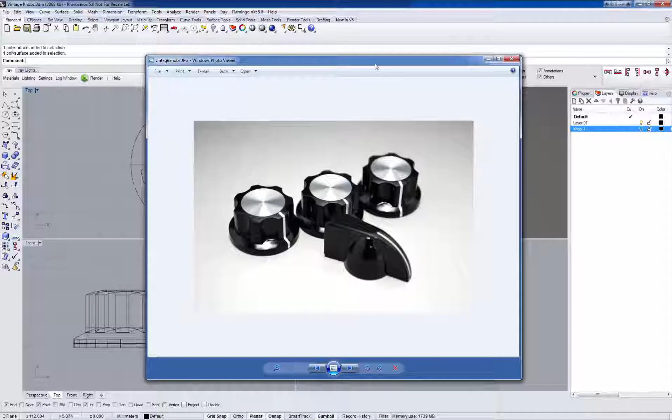Hi, in this video I would like to show you some modeling and rendering tips to render out a vintage knob like you see here on this image. This is the reference image where I created the model from, which you can see here in the Iray preview. So this is the plain model, and now let's start applying some materials to it.

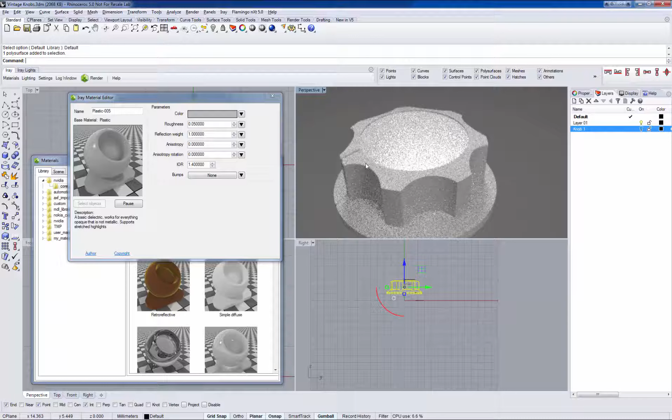So this is black plastic. Let's add and edit this material to the scene. We can assign the material by dragging and dropping the preview icon to the object, and we set the material color to something very dark. Never set it to pure black because that will look unreal, but something like that.

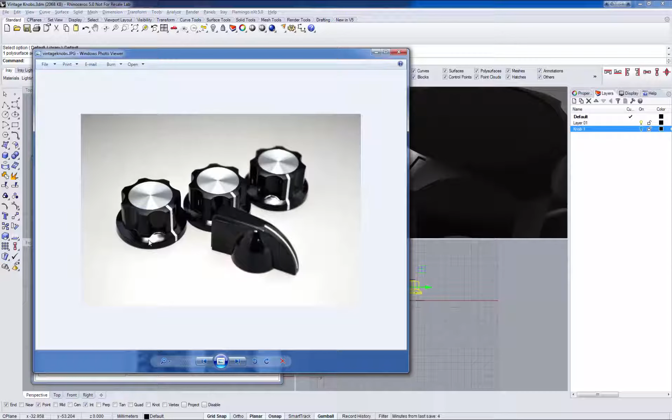If you take a close look, you see that the surface appears very smooth, so there's no structure there. But if we compare with the image, you see there's some slight bumps going on. So let's create these bumps first.

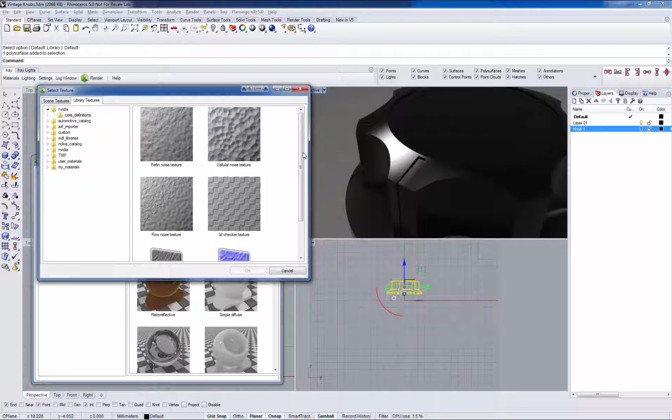We have a slot here that allows me to connect bumps, and I'm going to select a texture. If we switch to library textures, we see all the procedural textures that come with Iray for Rhino, and we're using a Perlin noise for our purpose. We apply it, but we don't see much of a change yet.

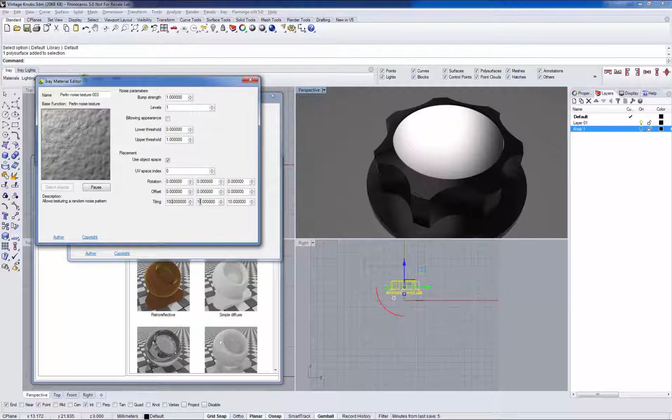The reason for that is that our model is in millimeters, and we need to increase the tiling by an order of magnitude to actually see this pattern. So if we take this for 100, I guess we need something like 1000, or probably even more, to get the structure, and we start seeing now the pattern.

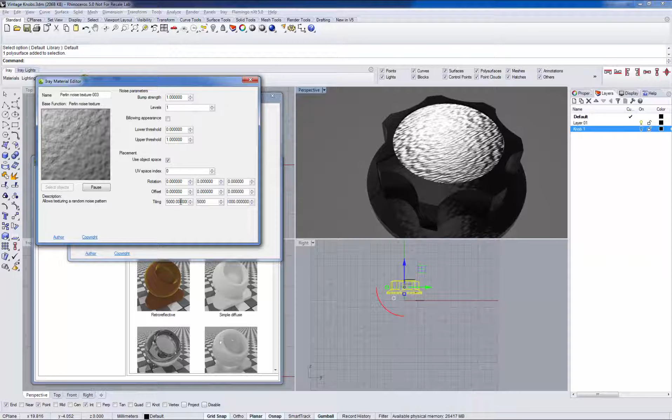This needs to be much finer, so we can go for 5000, and now we start seeing some nicer structure here in the reflections, but it's even finer.

So maybe we increase the intensity, set the bump strength to 0.5, and we add another octave so we get some finer final look. As you can see, maybe we can even use 3.

Yeah, let's increase the tiling, so we use 10,000. This is a really large number, but of course we are talking about seeing really very fine structures in our material here. Actually this looks good.

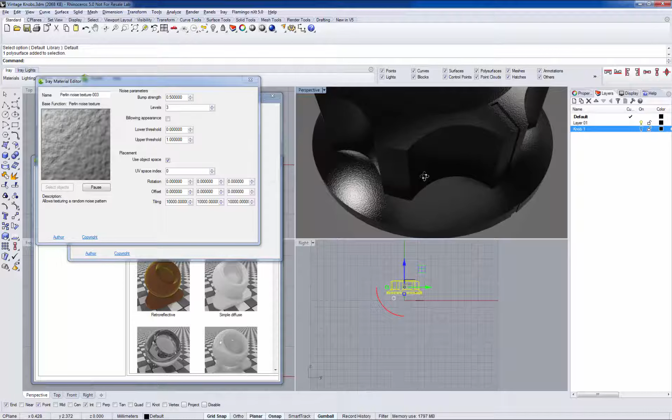I really like the look that we have here. It even allows me to set the roughness of my material to 0, so we get really more like this shiny, bumpy surface that I would like to have.

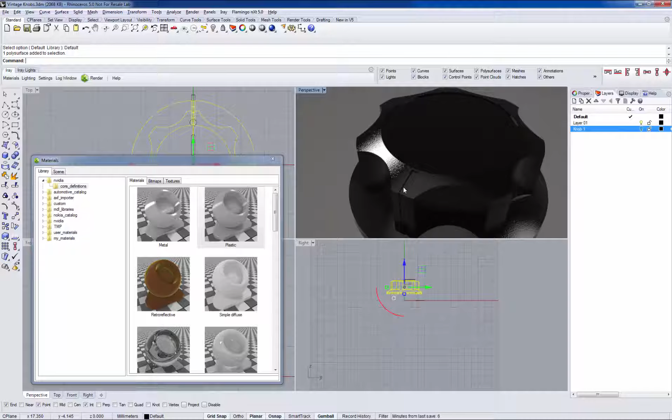The next step is that, you know, these edges are really sharp, so there's no rounding on these edges, and one way to do that would be to go in and place some fillets manually. This gives you greater control. However, this is a lot of work, and also this changes your model.

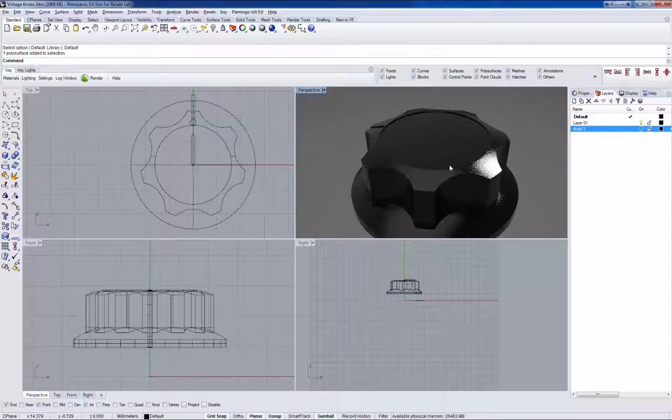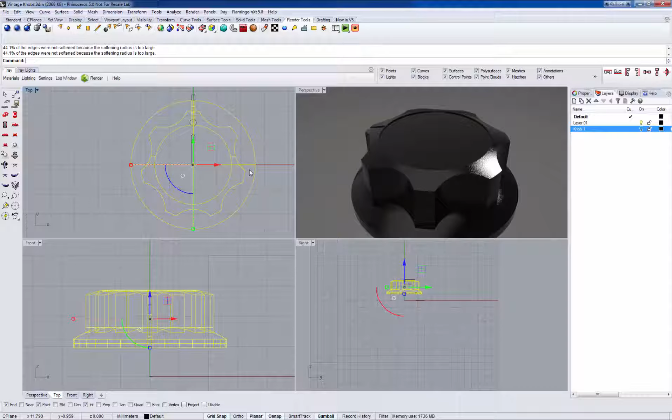There's a very nice trick that you can apply to get this without needing to touch your model. You select your geometry, and if you go to the render tools tab in Rhino, you see there's an apply edge softening operator. You can set the edge softening to a certain value, so 0.5 - if we're in millimeters, half a millimeter would be fine - and apply that, and you see that changes the mesh, and we get automatically now all these fine bevels, without having to manually model them.

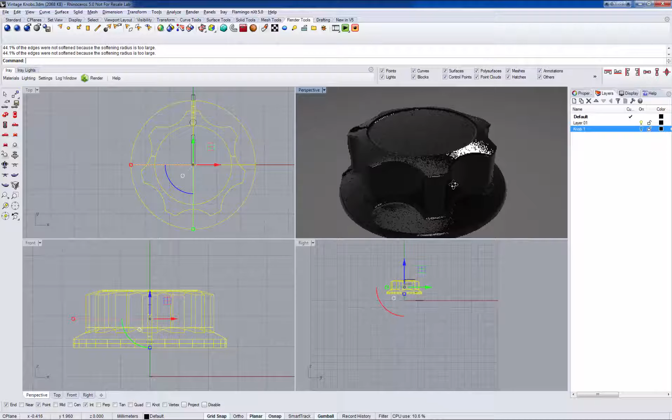So the model is still the same, but for rendering the tessellation is changed, and we get this edge softening. This looks fairly good, and this is now the vintage knob that we looked for.

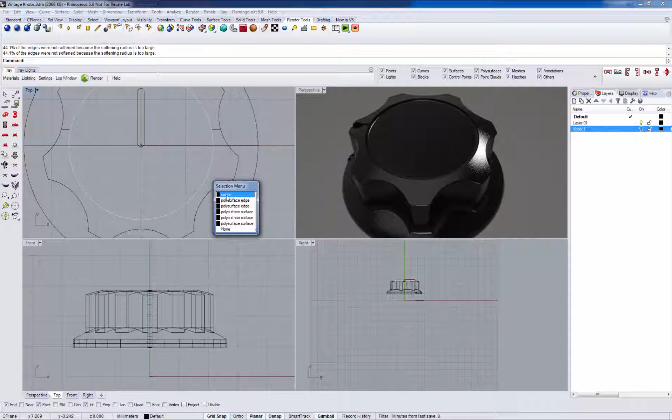So what's left to do is to create this nice anisotropic disc on top of the knob. For that, I would like to show you first how not to do it, because you won't get the effect. What people will feel tempted to do is take that curve and create a surface from these planar curves.

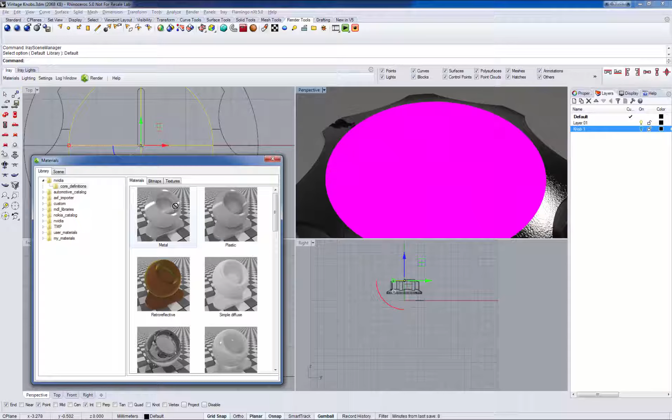Now if we go to Iray, we should already see that material, and we try assigning an anisotropic metal to that. So we assign a metal material, and if we edit this, we can make it anisotropic. So we set anisotropy to 0.8.

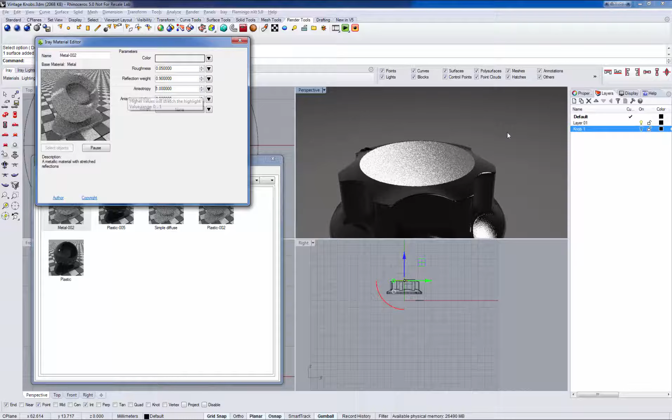However, this does not give us the look that we are hoping for. No matter at which value we set this - 1 would be very high, so maybe 0.9 - we don't get the anisotropic look. This is because we used the wrong method to create the surface.

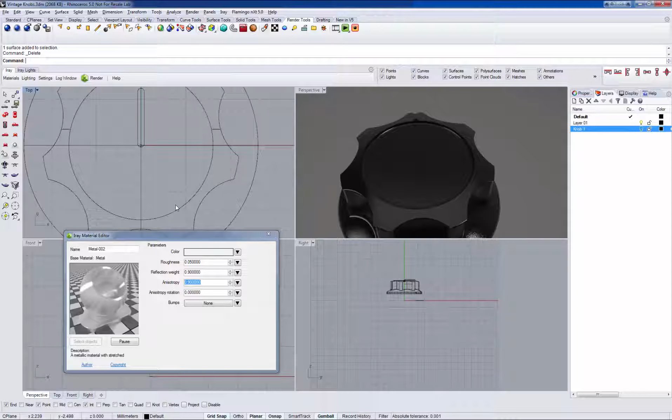So let me delete it and show you the right method to get the correct anisotropy. To do this, you create a line that starts at the center and goes to the border where this disk should be. So that is my curve.

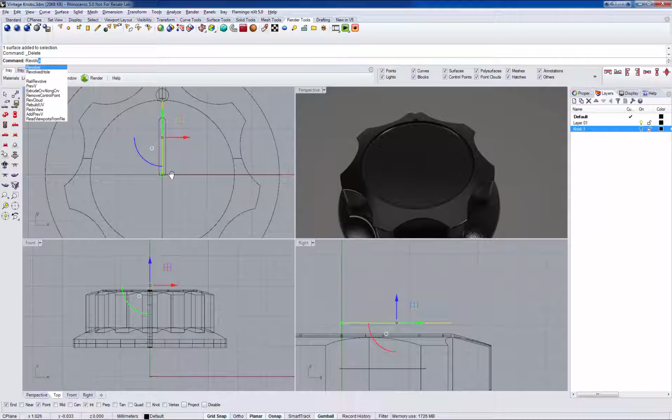Now what I do is I'm revolving this. Start of revolve axis, end of revolve axis - my bad, again, start of revolve axis, we need to set it in this plane - and start angle is 0 and revolution angle is 360, and now we get a disk.

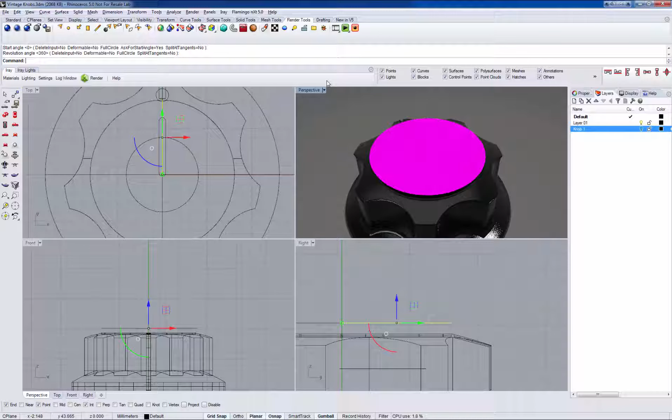If we look at it in shaded mode, you see that the seam is now here, and basically this is a different UV layout that we get on the disk. This special UV layout will give us the correct anisotropy on the object.

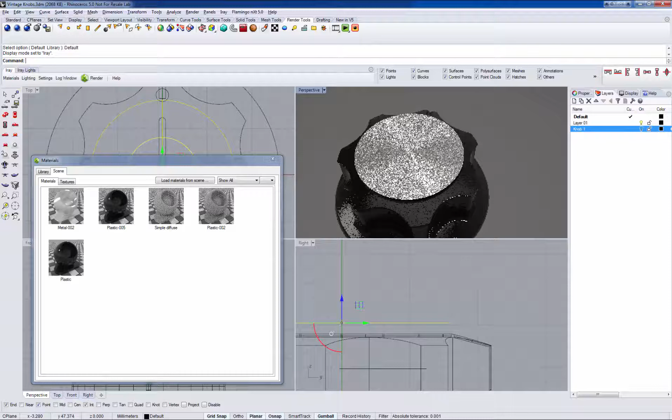So if I set this to Iray rendering, you see now I'm assigning the material and we get exactly the look that we were aiming for.

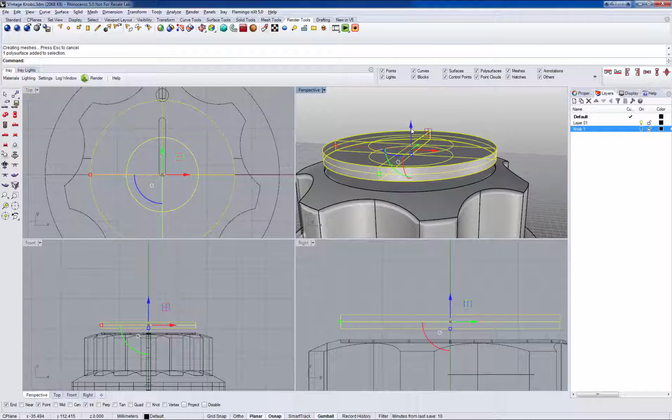So all that's needed is I could try to make this a solid by extruding it and now moving it down and placing it inside here.

Here's the same thing, I could try to create a soft bevel. I will show that method again. So I'm applying the edge softening - maybe 0.1 seems appropriate for this.

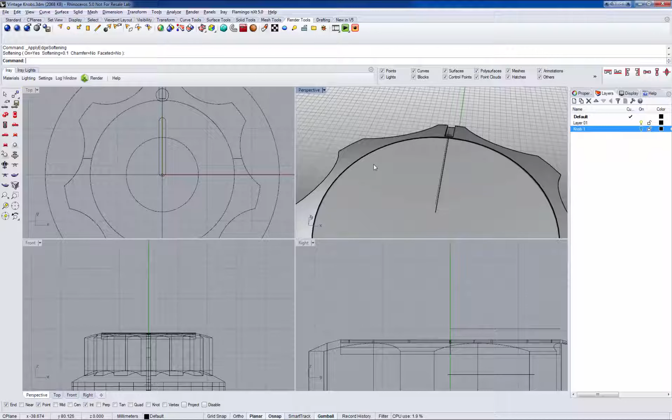If we go, you see already here in the shaded preview that we get this softening. So if we switch to Iray, we see this very fine crease there, which looks much more real than if it were 100% perfect and the surfaces are touching each other.

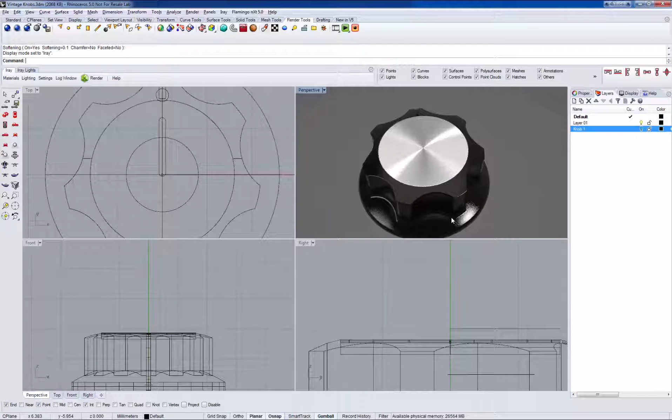So those were some tricks on how to model a vintage knob in Iray for Rhino. You saw how to use procedural noise to get some nice surface structure, how to use the apply edge softening operator, and how to model disks so that you get some really nice anisotropic metal reflections on top of it.